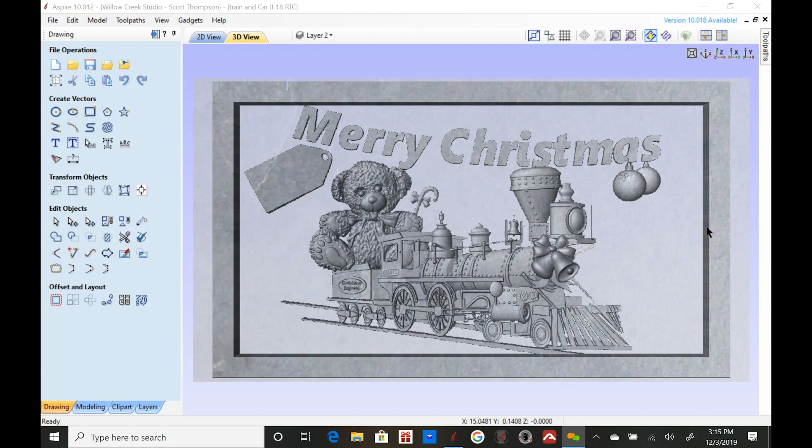We used curry combs, horse curry brushes, to kind of sand and get smooth areas, and lots of chisels and pocket knives and stuff like that in snow. And unlike ice—we did a lot of ice carving too—there you're allowed to use power tools.

So my background—this is all the setup to tell you guys that my background is an artist. I was telling Ted earlier today, and as I just demonstrated, I am not a technical guy. I'm not a computer guy, so I get choked up on computer stuff all the time. So if you ask hard questions, you'll probably get muted—I'm going to tell you so.

Well, what I wanted to show you today is I work in Aspire. So I'm going to do a piece with a crappie bass in it for you guys. I modeled the crappie bass a few months ago and sent it off to a few guys, and they all want to know, well how do you create all the environment? I mean, a lot of you guys pick up a model of a deer or a wolf or something, and you want to create some environment around them first. So I'm going to show you the tools that I use to kind of frame up an individual model.

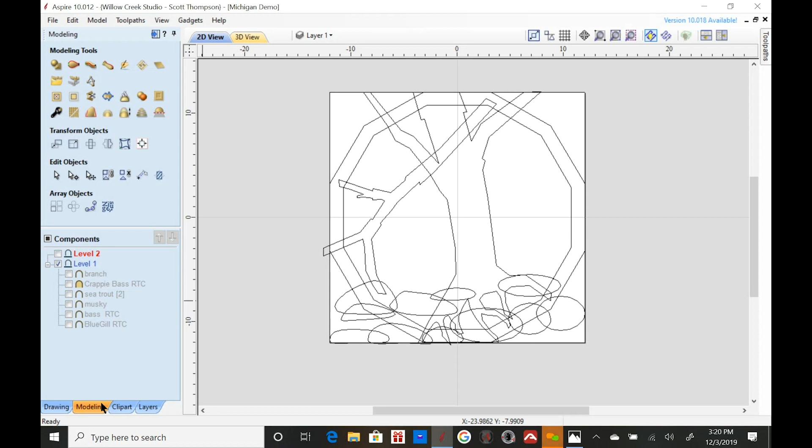Somebody else coming in. This is a 24-inch piece.

I usually start out by setting up, going into these screens, and some of this will be a little redundant for those who see this regularly. Job size, I'll go in and set up job size. In this case, I'm doing 24 by 24 inches, and you can see over here it's a 1.5 inch board, so this will probably be something I glued up.

I have it in high resolution. I commonly use, when I'm modeling, this slate black, just because I like the way shadows show up on it. It helps me visualize and see stuff better. So I get that set up.

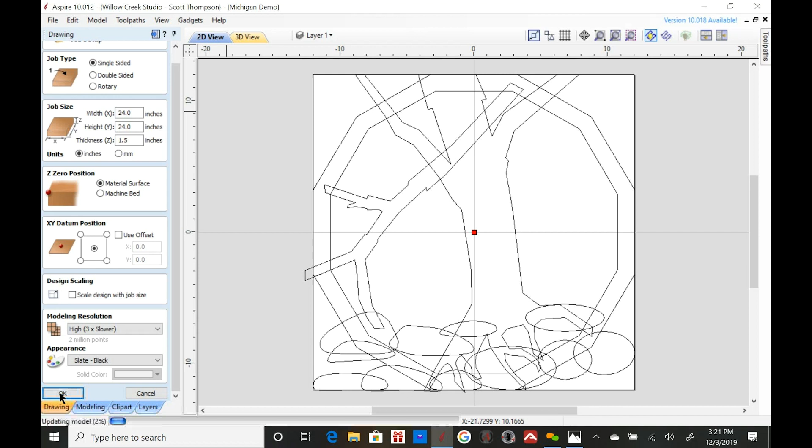So basically 1.5 inches. If I'm building a model, like when I have the crappie bass, I build them 3 feet wide and 4 inches thick, so I had lots of space to work on that. Here I got a smaller one.

I'll show you how I import them. So I've created a lot of vectors already on this. You can see, I used the polygon tool to create the frame vectors, these two out here that are apart. I'm not going to go through that - I'm assuming you guys have played with that kind of stuff a little bit. I'll just delete that one out of there. So I have two polygons here that are parallel to each other. That's going to form my frame.

So the board's 1.5 inches thick. I want some of these elements, like the branches and some of the rocks and maybe part of the fish, to come out of the frame, because I don't like to have everything just stuck inside a frame. I like to bring it outside of it a little bit for artistic reasons. So what I've gone in with and created these vectors - I've got some tree branches and stuff like that.

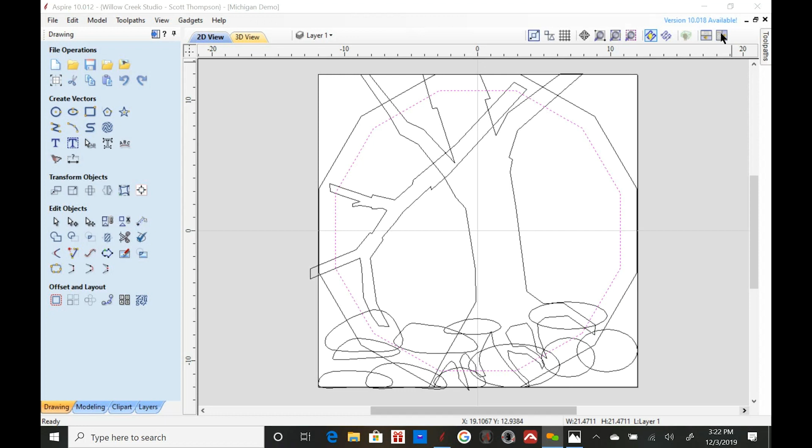So we're going to start out by, the first thing I'm going to do is create this frame. I'll split the screen by using this screen splitter up here. Let's see if there's a way - I'm going to probably turn off all your faces because it won't let me click on someone. So I set that up so you can see this, or split.

So I'm going to click on these two vectors together and hold down Shift, and click on that second vector. And I'm going to go over to the Modeling tab and click on Modeling. I want to create a flat frame, so I don't want any angle here.

I'm going to set it for 1.3 inches thick. Remember, I have 1.5 inches of wood. We're going to play, and when we're all done with this model, we're going to set the depth slightly differently. But I want this whole playing field, I want 1.5 inches to play in, so it's going to be 1.3 inches thick. There is no curvature, there's no actual final height model.

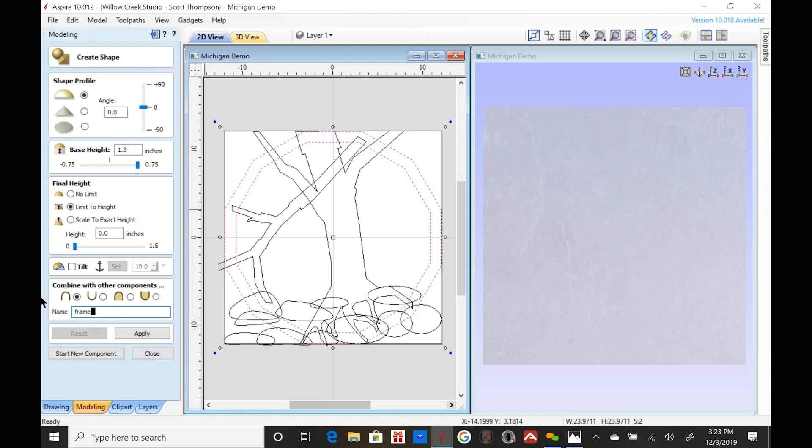And I'm going to just label this as frame, and I'm going to hit Apply. And we get a frame. So it's a little bit less thick than my materials are.

So the next thing I'm going to do is I'm going to start another component. I'm going to come over here and I'm going to say, let's create a tree. Now I want this tree to be a great big kind of root ball tree. There's going to be some fish swimming around it, and I want it to have some bark on it, and I want it to be places where there's no bark.

So I've kind of drawn this in pretty quick with node editing. I'm going to go back and show you guys - if you haven't used node editing, well, you have to draw some vectors to do it.

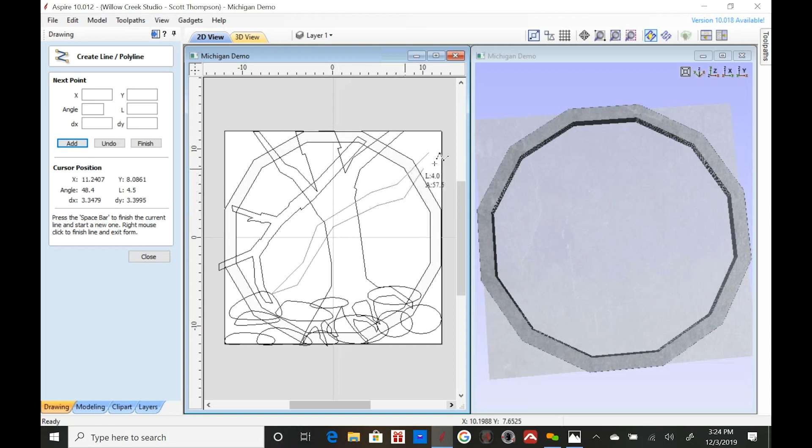So I'll come in and I'll draw a branch just across the whole piece, and then I'll play with it in node editing. So I'm going to delete that one back out of there. But using this draw a line diagram, I rough in trees pretty quick.

So I'm going to delete that out of there and go back to this one. Well, this isn't quite where I want it to be yet. So up in this area here, I've indicated there's going to be some bark here and there's going to be no bark here. So I'm going to come back down and create the equivalent of that at the bottom where the bark ends.

So I'm going to go back into the node editing tool, and right here I'm going to decide - I'm going to hit the I key to insert. I'm going to come out a little bit, not quite that much. I'm going to insert another node. I've created some more thickness right there in the tree.

I'm going to come over here and do about the same thing, create a node right there, making the tree a little bit thicker so maybe that part of it's thicker.

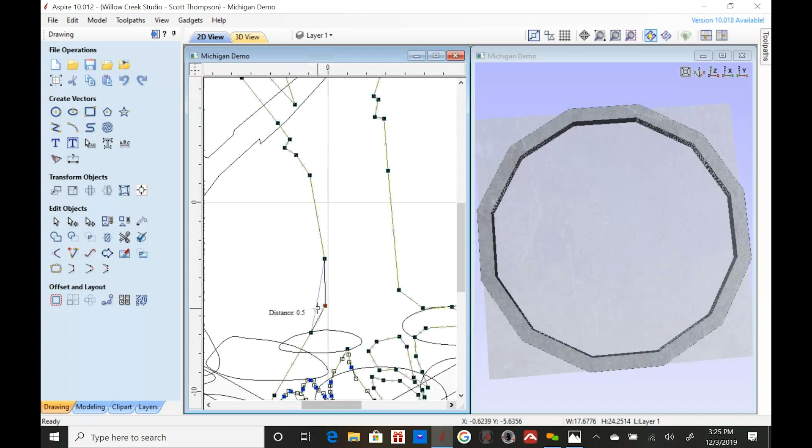Before I go too much further, some of this down here gets a little too linear for me, in two straight lines.

So if I go back to node editing, you can see all the nodes. One of the tools I'll use is grab a bunch of those nodes - now they're all red, you can see that if you look close. I'll click the S key, and that makes them all smoother shapes that better suit what I can play with.

We'll do more of that when I finish off some of these rocks down here.

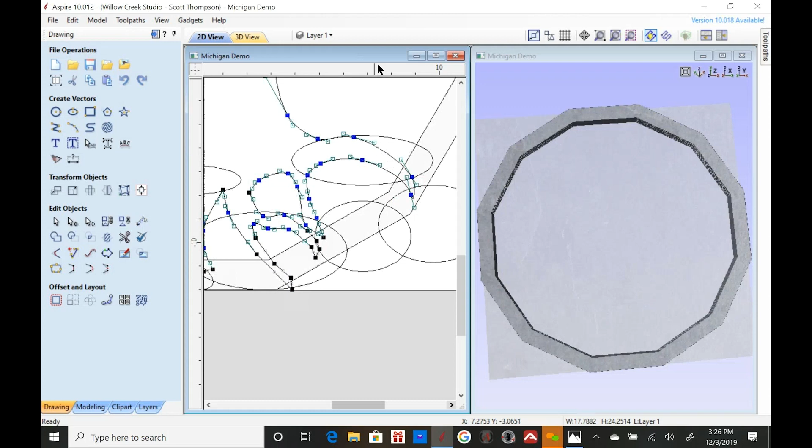I've got somebody else coming in. Dawn. Hello, Dawn.

Now I can see this tree. I don't like how thin the tree is right here, so I'm going to want the tree to be a little fatter. I grabbed the wrong bit of the...

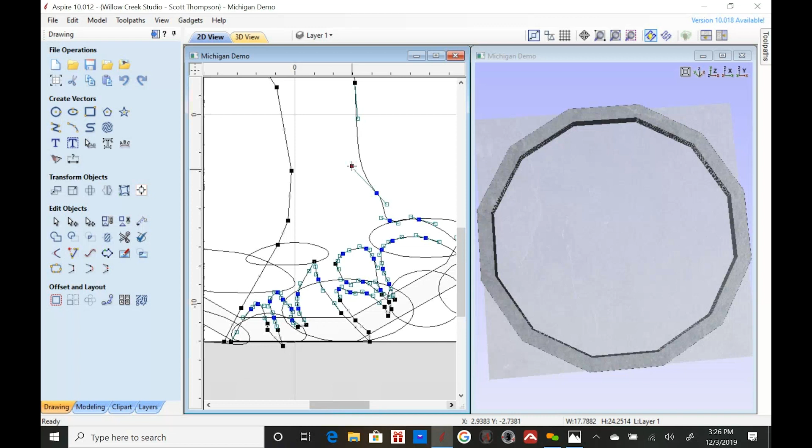There's the basic shape of our tree. Now I'm going to go back, dropping out of node editing by clicking on that button. Now I'm going to create the model of that tree.

I'm going to go back to modeling and click on create a shape. Now this particular shape, I want it set - some of this I haven't set already.

I'm going to go with a very small base. The base is the flat area before the model starts taking shape.

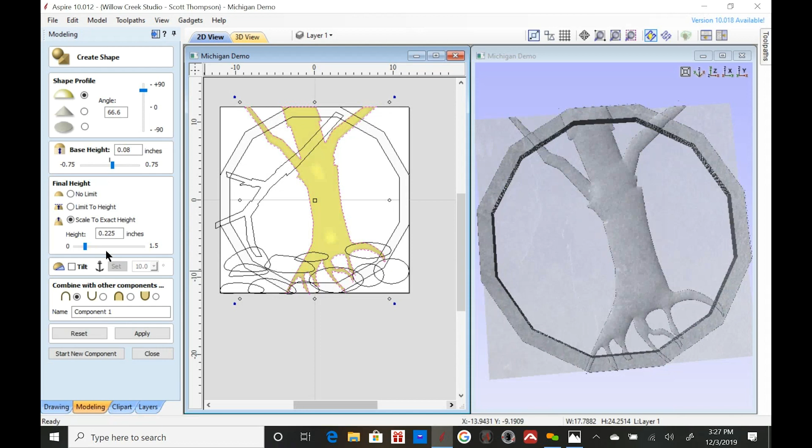Anywhere in here, if you haven't played with this particular tool, it tells you how rapidly the sides of the model are going to take shape and go up. Right now it's set so that most of the curvature occurs in the first part of the shape. I really don't want it that - I want it to be less rapid.

Now remember, we have 1.5 inches to play with, so I want this tree to be reasonably thick.

A couple things are happening here with this tree. One is that you can see it stacking on top of my frame - I don't really want that. But I'm going to call this, let's call it stump.

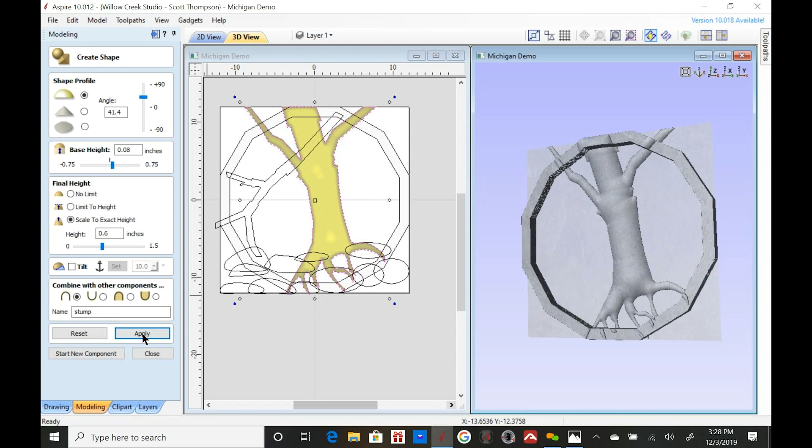I'm going to apply. I kind of like the general shape and the thickness of the tree. I'm going to close that right now.

And so these roots here, you can see very clearly that that's stacked on top of the frame.

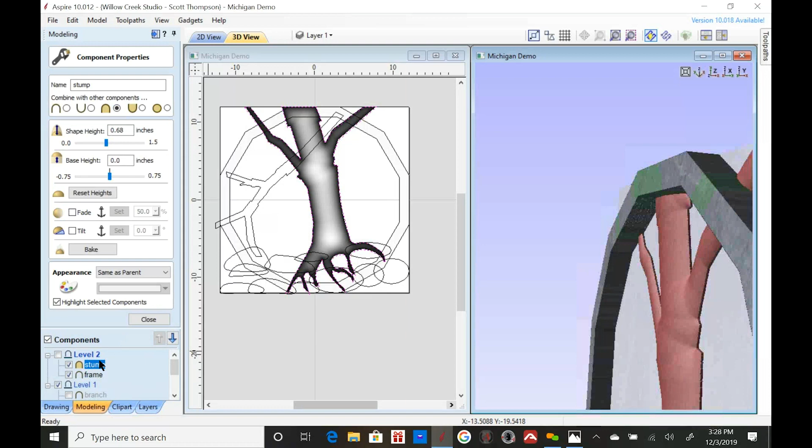So the way to get rid of that problem is to go through a process - this is how components combine with each other. So if I make that stump so it does not combine on top of the other elements, now it's below the frame. Does that make sense?

So this tree, looking at it, it's about 7 point. I'm going to make that tree closer to 1 inch thick, get a little more thickness out of it.

Now what I'm going to do next is - I have a Wacom tablet. For any of you that do artwork on 3D digital stuff, I have one which allows me to draw with a pen, and when I'm doing serious modeling I use it. But since I'm working with you guys, I'm going to just simply work with my mouse, which isn't quite as precise. I'm going to take this tree and do a couple things with it really quick.

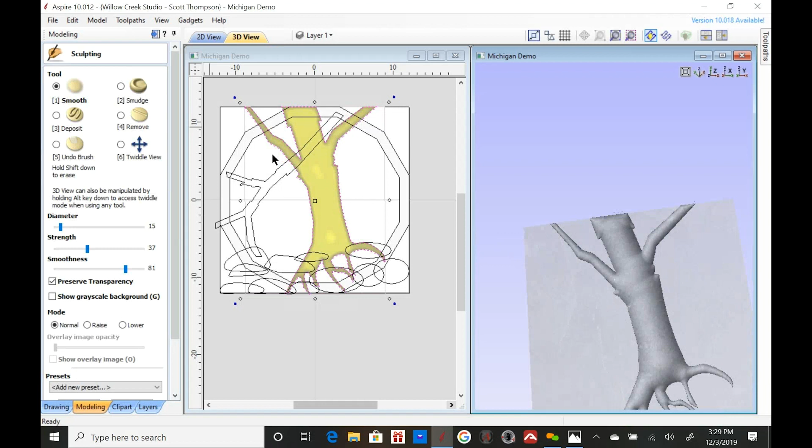It's easier for me to just make - I'm going to come up here to the sculpting tool. Now the only thing that shows up now is the tree. I'm going to go to the twiddle and drop this down to full size so I can see more of it.

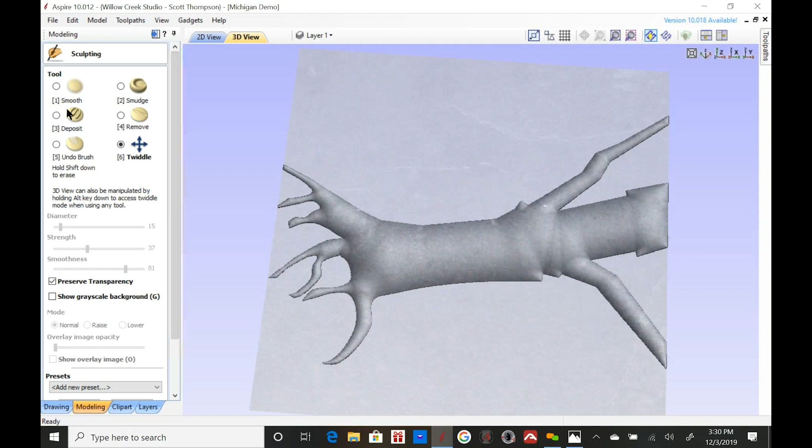I'm going to turn this tree sideways for a minute because it's easier to make left and right movements than down movements with a mouse. So I'm going to use deposit - now deposit comes with a bunch of different functions here.

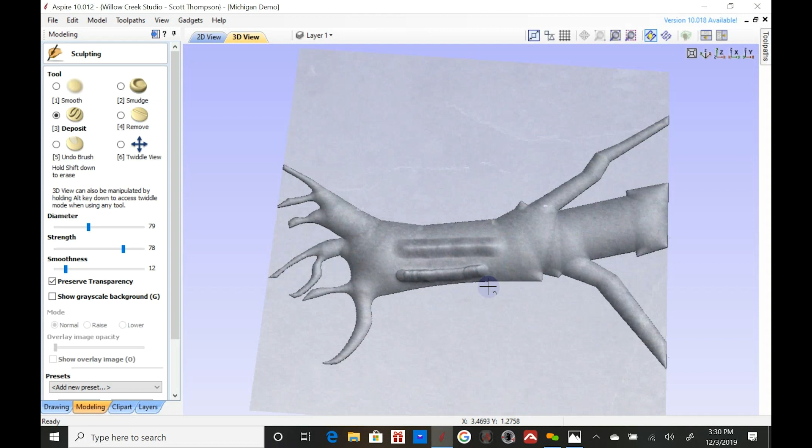The diameter - I have a roller on my mouse which makes it easy to change the diameter. Then the strength, which you never know till you start to put something on. And then the smoothness - look at that, that's a very smooth addition. If I make it less smooth, you can see the difference between the two. I kind of like this rough one because it's a little bit more bark-like.

And then my favorite brush of all - if you're going to be an artist, you have to know how to undo stuff. I'll just erase what I did there quick because that's not quite what we want to do.

I'm going to go back to deposit, a little bit smaller. I'm going to use slightly unsmooth, pretty strong, and start laying in some bark in this part of the tree. You'll see if you watch the size of my mouse here, I'll change it up a bit.

And it curves when it gets down here to these root balls, and I think I'll put in a kind of a knot right here.

Add in some more texture, different sizes for the roots, and up to there.

I'm going to go over to remove now for a minute. I'll click the remove tool and just kind of carve out some of what's in that knot, using the remove a little bit in here to make that bark a bit more. This is something you need to just play with on how you do it. I also use the smudge tool, and the smudge tool kind of blends things.

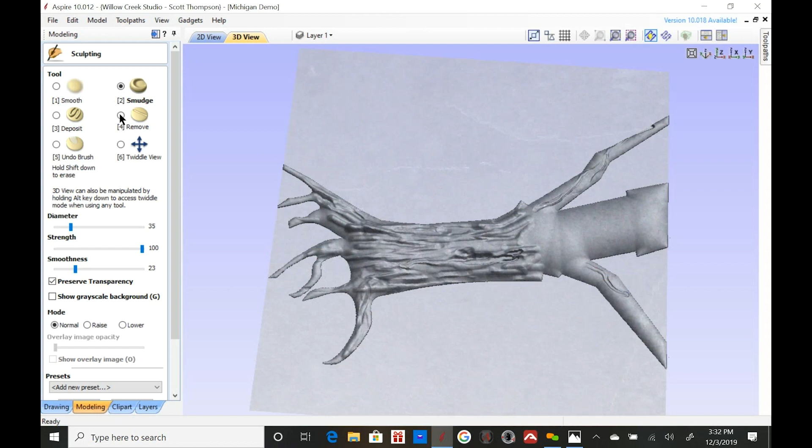So back to a twiddle for a minute. Pull this up here. Now I have more bark up here, so I'm going to lay most of my bark in quick, and then I'll come back and show you how I tie those together.

Put a remove in here for a second, and let me go back. I'm going to smooth out this center section for a minute just to round the edges of it a bit more. And then I'm going to use remove.

A lot of these big trees that we have, at least up here, big cottonwoods and stuff, you can see some of the twists. That's a little more than I wanted to do, so I'm going to take some of that out with my undo.

I'll go back to remove, and I'll soften that up a bit and make it smaller. I'm just going to put some curves around that log. It helps the visual, helps the eye understand that that's a round element.

And I'll put some cracks in it. I'm going to give myself a little extra here for this, and put just off center a crack in this log. Maybe something down here with this branch.

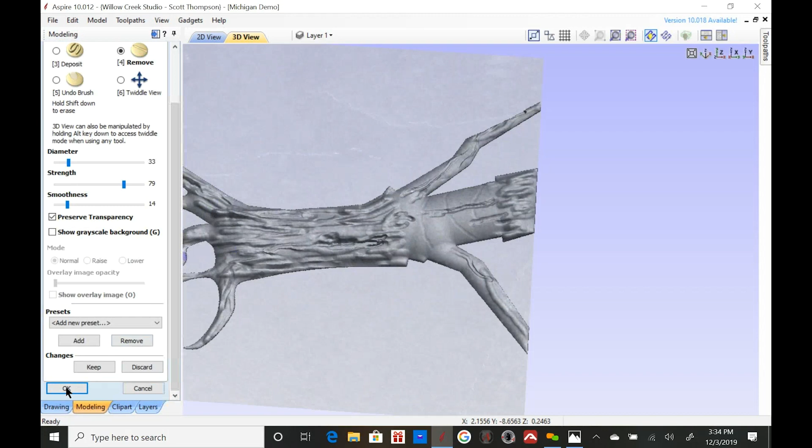So that's kind of the basics of just making this. I'm going to say keep that now. If you use this tool, that means you can't go back to where you were before. I'm going to say OK, and I'm going to put my tree back where it was.

And there's a tree. Now I did that with the other tree already. Oops, I guess.

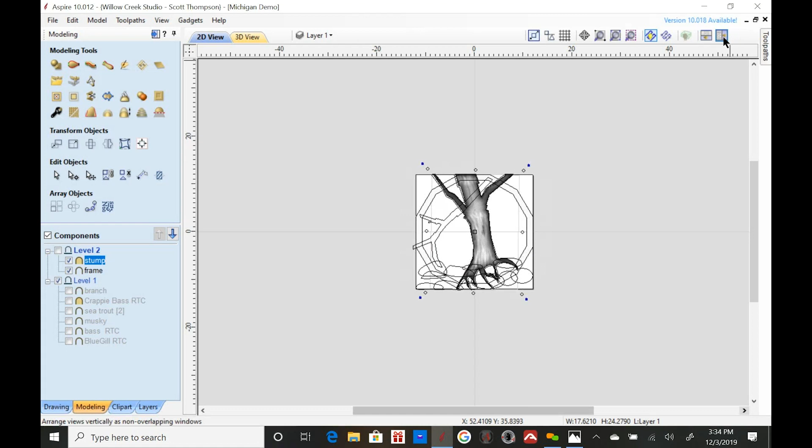Let's see, I apparently turned the whole thing. You guys are supposed to watch that stuff. So I turned the whole frame and everything. Now we're back to where they were.

I already did the other tree, this branch here, so I'm going to bring it up and add it in, so you don't have to watch me do that same thing all over again. You can see they're kind of impacting each other and hitting each other, and that's not really what we want to have happen.

What I want to do is build some rocks really quick with you, and then talk about how we get the fish to swim in and around these different branches, and how we get the branches to not impact each other like you see happening right here. But I'm not going to worry about it for right now. So, any questions about making a tree like that? Pretty simple stuff.

Aspire. So down below here, I drew on this side. You can see all I did was add in a bunch of ovals, one, two, three, four, five. And on the other side, I've already started editing the boulder.

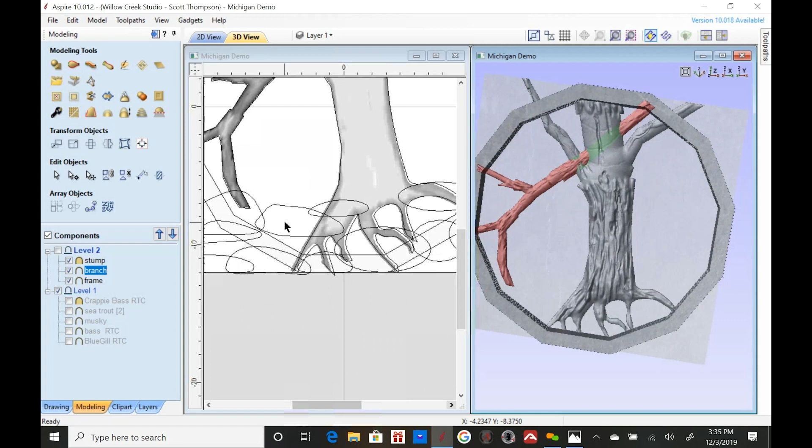All that means is click on this rock right here, and I'm going to go back into the drawing tab. I'll hit node editing again, and I just want the rock to have kind of a flat bottom for this piece of artwork. We'll make this side a little deeper, and change some of the aspect of that a bit, maybe make the rock a bit more like that. A couple other rocks here we'll do quick.

We can move these all around later.

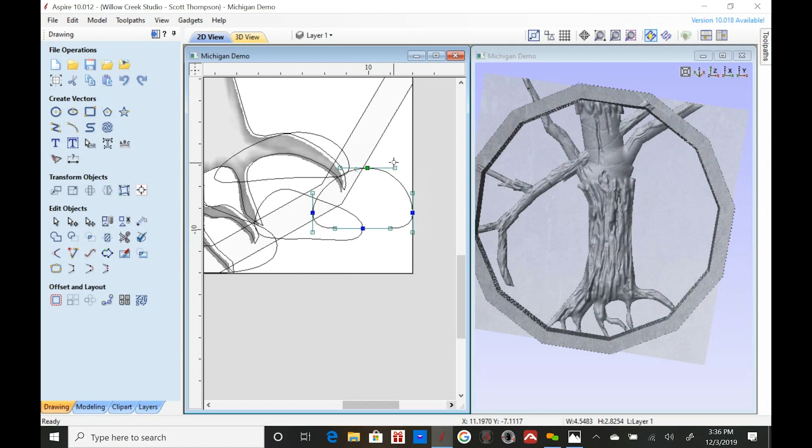So I got a bunch of rocks, at least the lines drawn out for some rocks at the bottom of that piece of artwork, and now I'm going to start. Whenever I paint, I paint at the back and then forward. So you'd put the sky in first, then the mountains, then the trees, then the duck in the foreground, sort of thing. It's not unlike that with rocks.

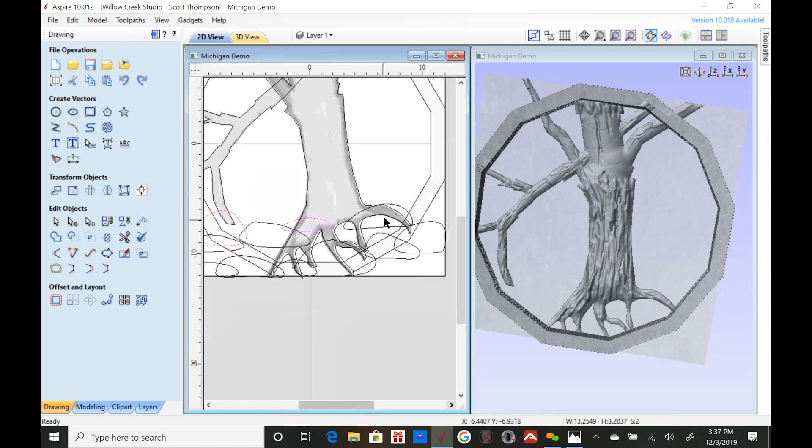So I'm going to go back to my selection tool. I'm going to select some rocks that seem to be in the background and do not overlap each other. Now remember, this tree is about, what did we set it at, almost an inch thick, right? But it doesn't have much of a base, and we'll end up having to play with that a little bit later on. So I'm going to create a group of rocks.

I'm going to create 3 rocks at once, not much of a base height, 6/10 high, a similar kind of an arc to the top, and I'm going to call this back rocks. I'm going to hit apply and see what occurs with my back rocks.

So you can see what's going on with how they stack. They're not stacking the way we want them to, but I'm okay with that. I'm going to hit close. If I move them underneath this, you'll see what immediately happens is now they're behind the tree, because the stump is set up like that, but they're still not in the right place relative to the frame.

So I'll move them, but that doesn't do it either. So back to how they stack, we'll click on this. I can't tell you how much time I spend with this trying to get it right. You can see the rocks are now back behind the elements I want them behind.

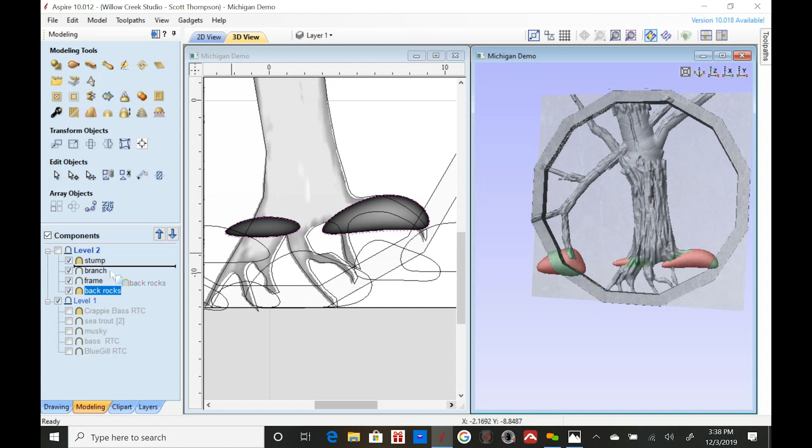So it makes a difference how you stack things and then where they are relative in your model, how you put them in your levels. Does that make sense? Something like this is pretty simple, but you start doing something like that train I showed you early in the class, and it starts to get very complicated.

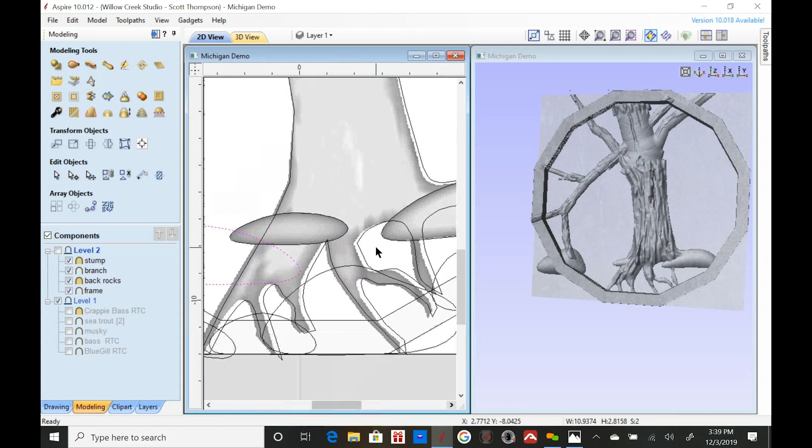So let's put in a couple more rows of rocks really quick. I'm going to get... that's a tree, we don't want that. There's another row of rocks. We'll do the same thing.

I'm going to add this and click it right away. We're going to add a little bit more depth there, because we want those to appear in front of the other stuff. So you can see now I've got the rocks, see the difference right here, and that has to do with the base height. I increased the base height enough to get them to push out in front of the other rocks.

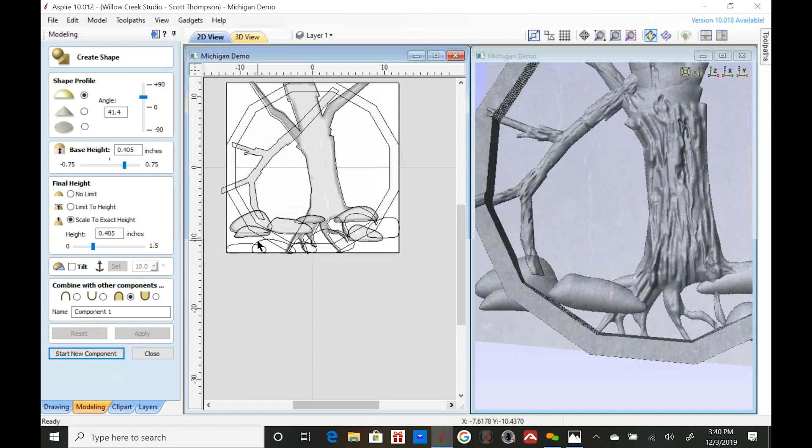I'm going to flatten down because I just don't quite like that. So that's rocks 2, or the new component. We'll do a couple rocks down here. These are going to be fully more in the foreground.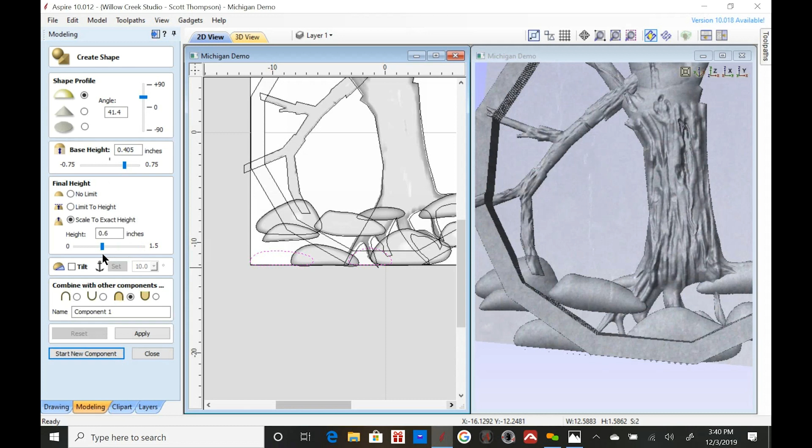These ones I really want to kind of come out a long way, maybe even... So if I put this all into the final shape, I get really pointy rocks. See how they're very pointy? And you can see with this one rock right here, it comes out above the frame, but we're framing it at 1.3 inches, and I have 1.5 inches of total material. So if I want a rock, this will be on the frame, but it's just a little too pointy.

So I'm going to come back down to something more rounded with the rock, I'm going to set the base. 0.75 is not enough, so I'm going to ask the base to be, I have a rock 0.4 thick. I'm going to intentionally create a problem here and ask the base to be 1.1. Now 1.1 was 0.495, about 0.5. If I just make that actually a half an inch, just to make the math easy.

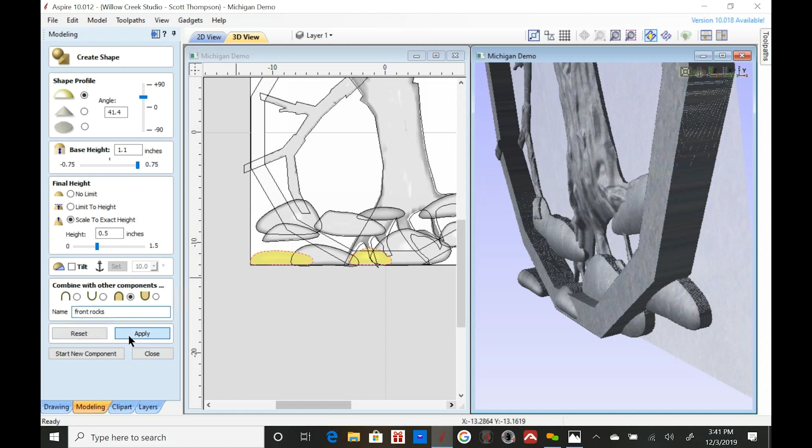So now we know about this will be our front, we'll call that front rocks. What we know about these front rocks is they're probably higher than the thickness of the wood. That makes sense. But they're where I want them to be right now, so I'm gonna leave that the way it is, just for right now.

So we've got this kind of roughly formatted here. What I want to have happening is a little crappie bass in here chasing a bunch of minnows through a brush pile. Pretty common, if you're out ice fishing, just fishing in general, jigging for crappie bass, you're in thick garbage. So I want to create that occurring, with the crappie bass swimming around.

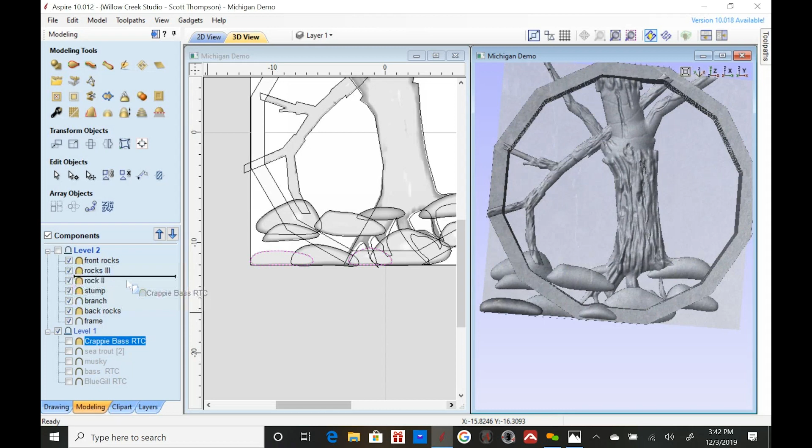So I'm going to bring my little bass up here and put him in. Turn him on. So there's my little buddy, but you can see he's swimming right into the tree right now. He's part of the tree, which we don't want to have happen.

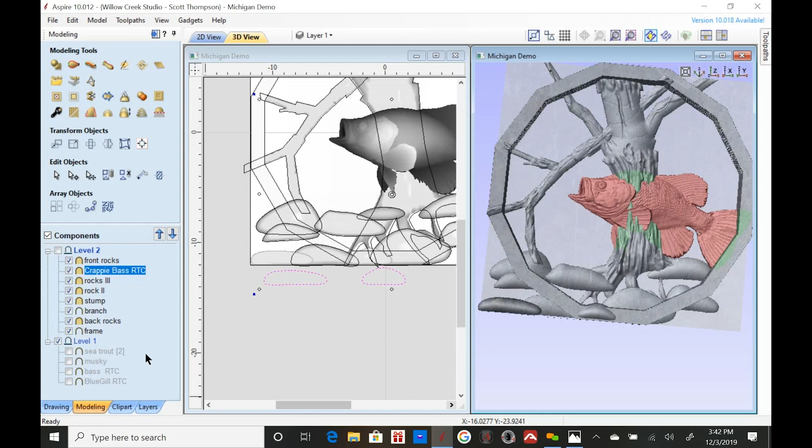So we're going to work on where he goes, and I have one other thing I'm going to bring in here. If you look down here, I have a sea trout model, which they don't really swim too many times with crappie bass very often. But what I like about the sea trout model is it looks a whole lot like a sculpin or stickleback, like a small minnow.

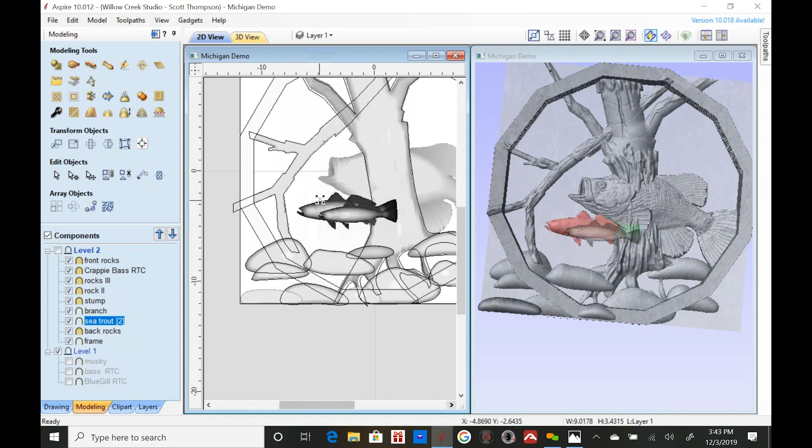I grabbed some of my rocks and brought them in here too. We want kind of a school of these small minnows in here, and I'm going to make him my sea trout be my minnows. So we're going to put a group of those in amongst these rocks.

We're going to have the crappie bass trying to grab one or two of them, and we want them swimming around the trees doing that. So let's play with just how this stuff all stacks.

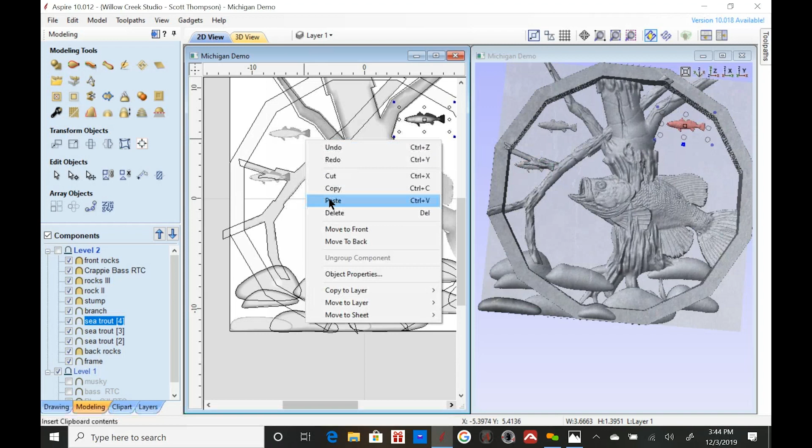I'm going to eventually copy the sea trout and paste him. So we got four of them. We'll play around with where they're going to go and how they stack. But the first thing we want to do is get the crappie bass kind of where we want him sitting.

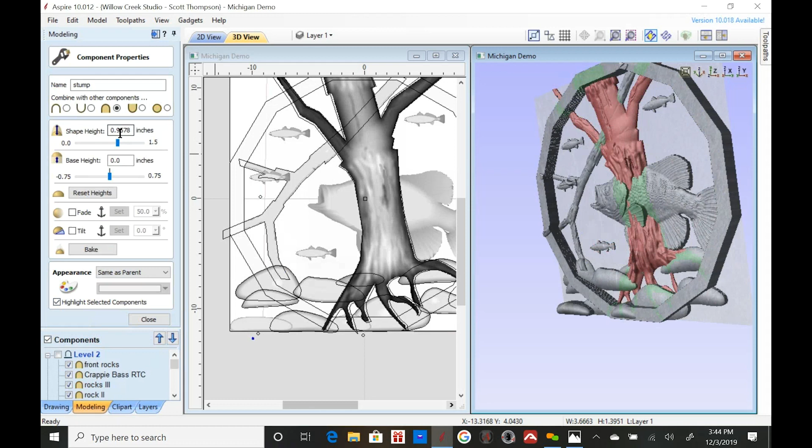So you can see this tree, we'll go back to the stump. If you look at the stump, it's almost an inch thick. So we have a half an inch above that tree to fit the crappie bass into. I don't know that that's enough, but I'm going to show you some tricks that I use to play with that.

If we kind of want him sitting right about where he is, we'll close that out and go back to crappie bass. You can see his shape height's about an inch, which as you take more height out of the shape...

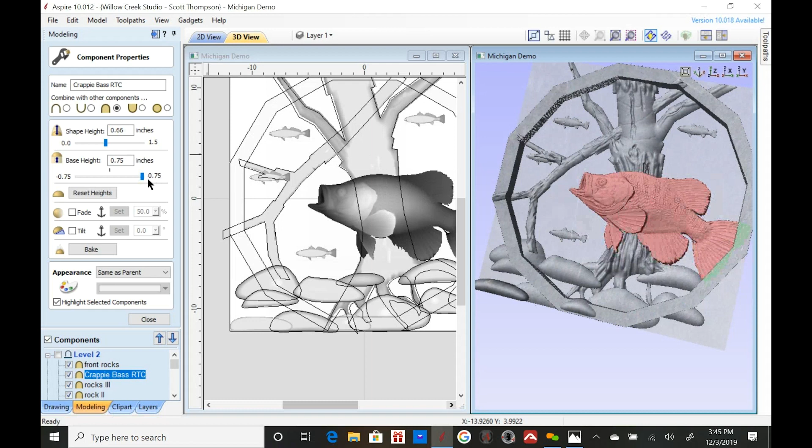He starts to lose some of his detail. We're down 0.6 of an inch, it's still not bad, but let's bring his base up. So he's fully in front of the log with that base at 0.75. You can see he's kind of fully in front of it.

What's going on with his tail? His tail is behind the frame. So what I want to do with that—remember, we have a quarter inch above the frame, so I have a little bit more thickness I can use in the crappie bass. But I think what I want to show you is I'm going to do a tilt function right here.

If you look over here in the model, I'm going to hit tilt, and I'm going to hit set. Now there's a couple interesting things about set that I just kind of learned. I want to show them to you in a couple different forms. So when it says set, it's telling you where do you want it to tilt from.

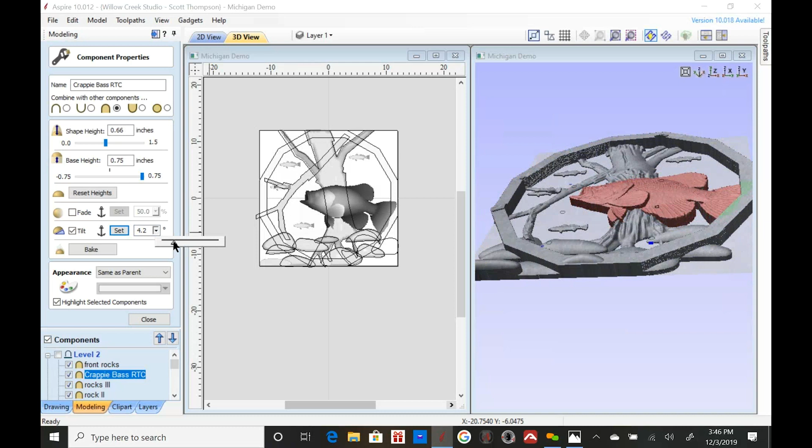But let's undo that for a minute and go back and say, well, maybe we don't want to do that. So let's go back and say set. And this time we're going to put the set point right here, and we're going to click on the end of the tail.

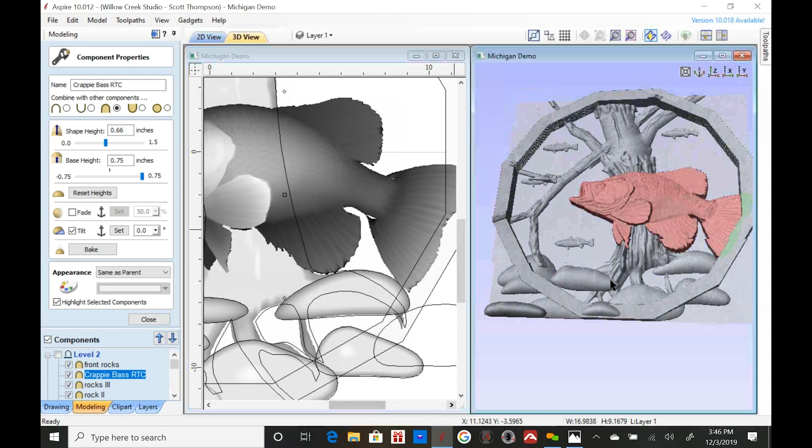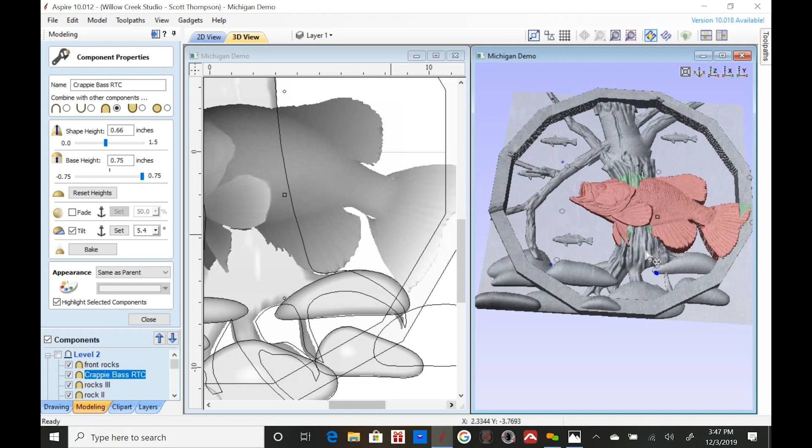Okay, so now watch what happens this time. We're going to do the same, about 4% of tilt. Well, that was interesting. So now this is different about tilt than fade. Did you notice what it did to the head? It lowered the head and raised the tail. I can't say that's what I thought was going to happen when that occurred.

So I'm going to undo that. I'll show you in fade here in a few minutes how it's different. So let's go back and reset. Remember, I'm an artist, I play with this stuff all the time, but I can't necessarily say I technically know all the reasons why it works.

So we're above the frame now. I'm going to take a little bit out of the base, a little bit back into the thickness of the model. Combined, we're at about 1.3 inches of total height.

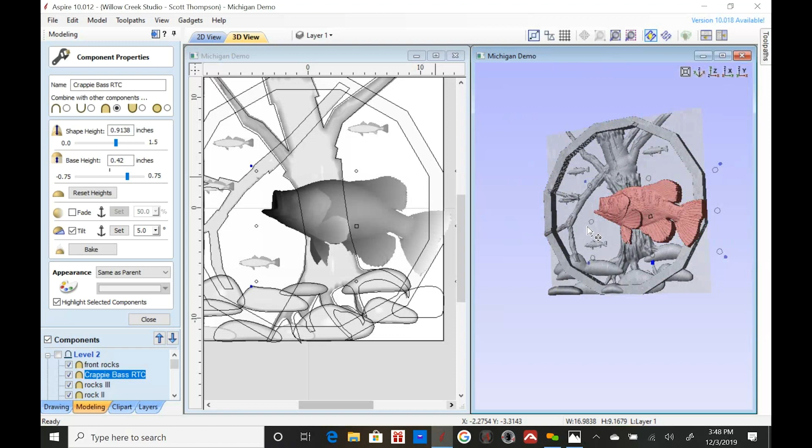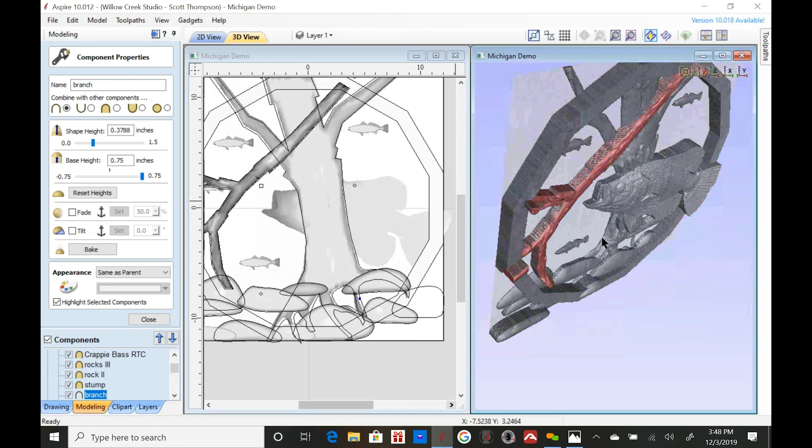So we'll come back to the crappie bass in a little bit. Let's play with this right here, put this stick in front of the log, and we can do that by adding base to it. We have the same problem here with it stacking wrong on my frame, so I'll look at how it combines, and that ends that problem really quick.

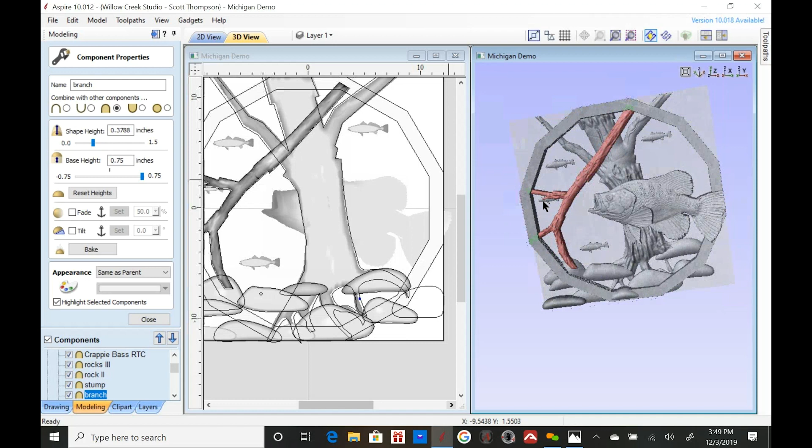Good. And then let's put our primary victim, this little fish right here. We want him in front of the stick, so it looks like the bass is about to grab him. So again, we need more base height to do that.

That's not enough, we're going to add in 1.1. I think that's going to be pretty close. So there we have it, you can see that he's kind of lined up with that.

You guys get seasick, just turn your head away for a little while I'm doing this. It's like somebody else in a car.

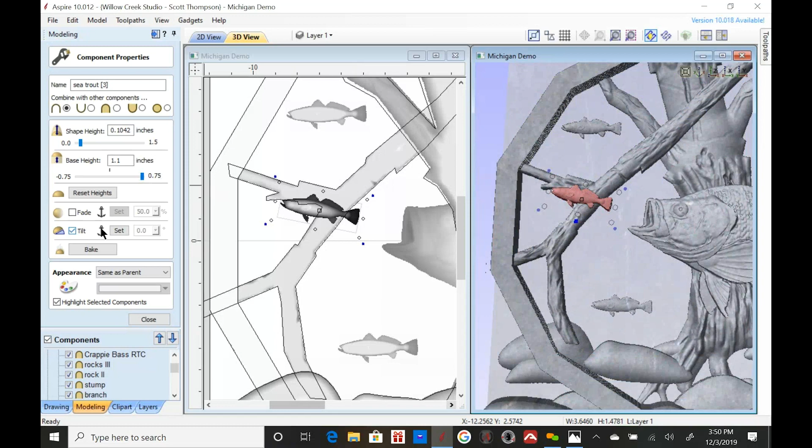I kind of want him coming out of the carving a little bit, so I'm also going to tilt this little minnow. You can see it creates that kind of effect, that's what's going on there.

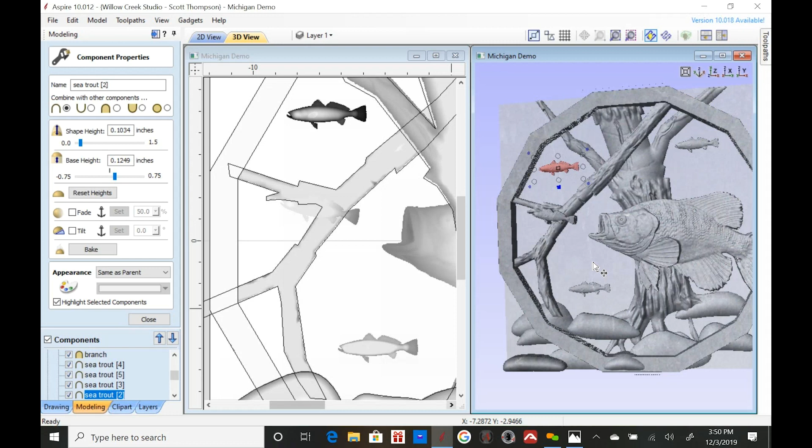Can you tilt at negative angles? Explain what you mean by a negative angle you want it to go. That you want it to tilt a different way, the head down and the tail up. Oh, is that how you do it? Yeah, so in this particular case, with this guy right here...

You can see right now his head's way up with how I set it. That involved me setting it, clicking set at the back of his tail and ending it at his head. But if I take that out of here, now he's flat again, and I say set, and this time I click on his head, and the second click is on his tail. Now what it's telling you is the second place you click is what's going to be raised. See how his tail came up?

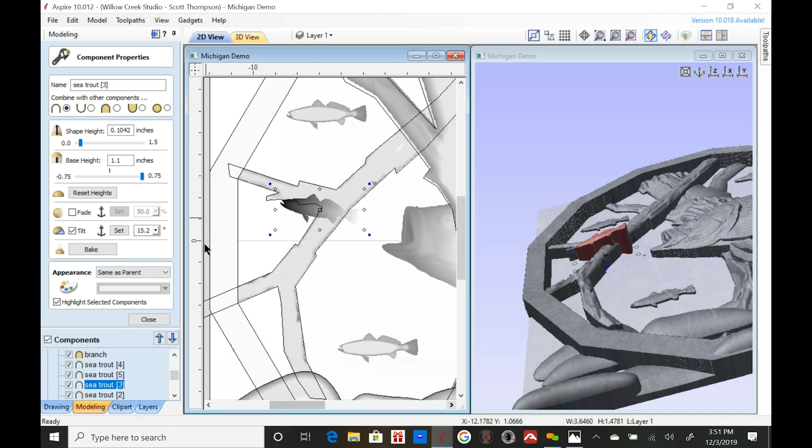Does that answer your question? Yes, sir. All right, you can lower him back down and say maybe that guy is actually diving underneath the branch to get away.

And we'll bring another one down here and get above the branch, one up. Maybe we want his tail just like he's coming out, so we're going to set, we're going to do tilt on this little guy. We're going to set again, and this time his tail up in the air. So I click on his nose, then his tail, and then... not enough, a little bit more height. So now I've got one of those guys going around the front of the stick and one going around the back.

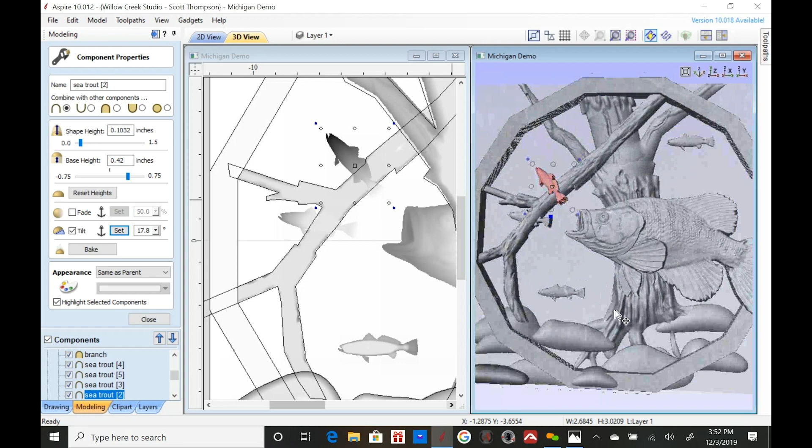Just try it away. All right, any questions about that?

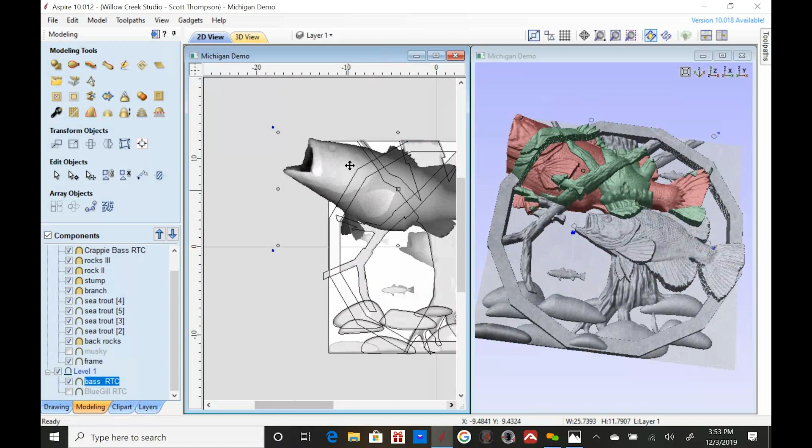So you can always... there's, let me see. You're dropping a large musky in the middle of this. I don't think anybody wants to put a musky in the middle of that one. I do have a large bass that you can put in. But you can do the same kind of thing for this.

I do a lot of this sort of stuff. Maybe we want to have a bluegill in the background. Probably fits better. Maybe put it even down.

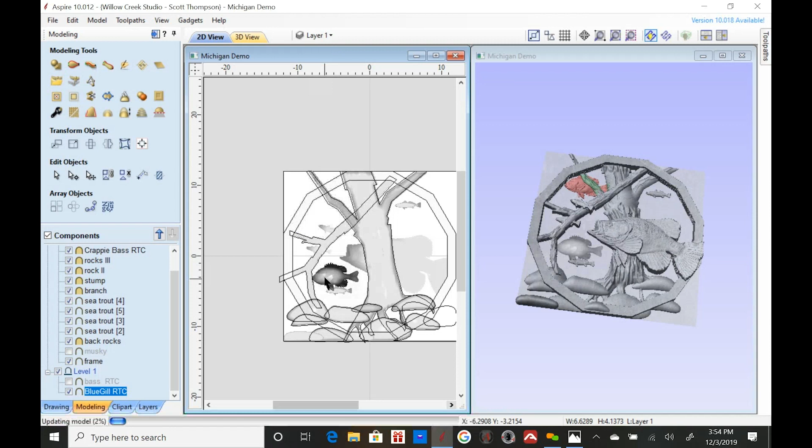So that's kind of the basics of what I wanted to show you tonight, just about... I know a lot of guys, I sell a lot of individual models like bass or deer or elk or moose, and they all want to know how can I get more environment behind them. I think if you have Aspire, it's pretty easy to make some pretty looking background, you just have to play around with how to stack the different components in there.

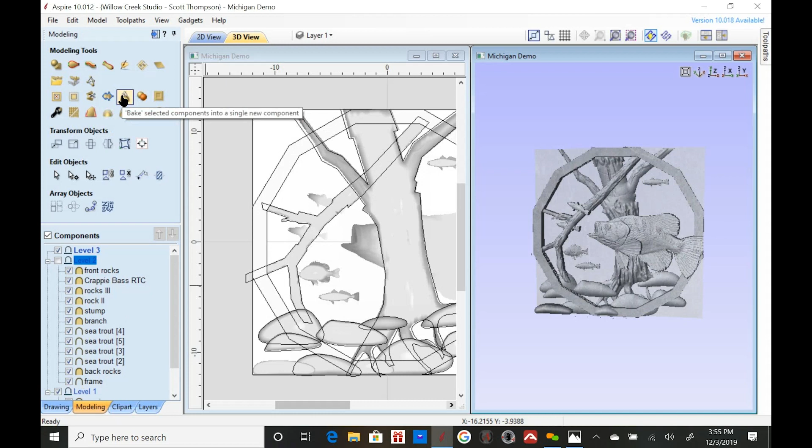If I was going to finish this now, I would insert another layer. And if you haven't used this tool, this is a pretty new tool, it's create component from visible model. We used to have to bake everything to do carving, now you don't have to do that. You just say create component, and it takes all the components and turns them into a model.

Now what's happening right now is you see everything in level 2 and level 3, so I'm going to turn off all the component pieces and just keep a copy of the visible model. So now I have one model, and I still have all the components of it. So sometime later, someone comes back and says, hey, would you put a carp in there, or want the fish to be bigger, or I want to do something different with how the rocks lay in there, I can go back and dismantle them. So to finish this piece up, I would...

Rename this, I'm going to just say... I'll rename it here in a minute. But right now you can see the total height of this is 2.6 inches, so it's way past the thickness I have. So I'm going to reset the thickness to 1.5, and I think what I really want to do is set the model thickness to 1 inch.

I'm going to go over and check my tool path. This gives me, if I have the models 1 inch thick, a half inch of wood underneath the model in the background. That's kind of how that would finish up.

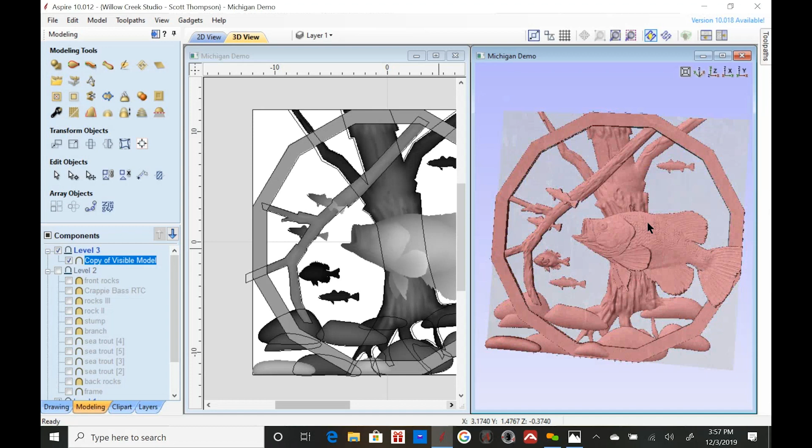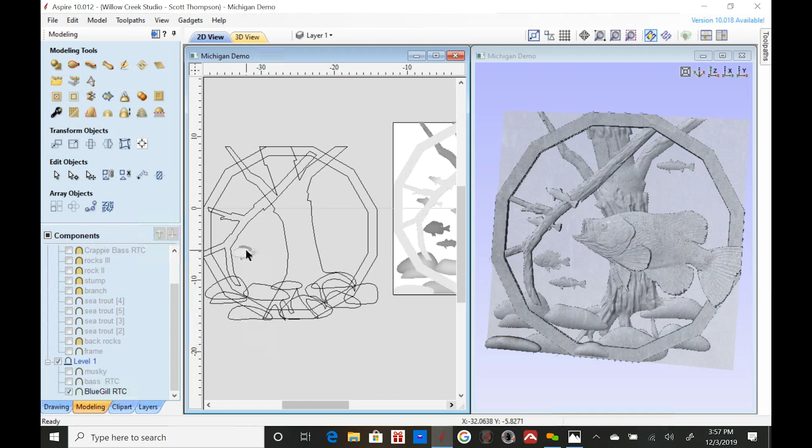So I can remove that. When I go to turn this into a tool path, I grab all the vectors and pull them off. That's all the vectors I used. I pulled the next row, the blue row, and then I had a couple more.

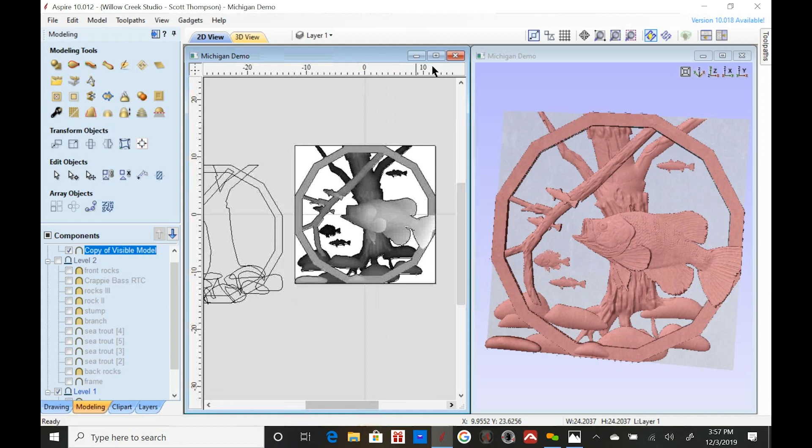So then you can hit this and, under modeling, use create vector boundary around this, and in a model like this it's going to create all one vector, really. If you look, you'll see internal vectors and external vectors. I'll hit shift, hit ungroup, and take off the outside vector used for the outside cut, then regroup the inner vectors in case I want to use them. But mostly I'll use that outer vector for the tool path.

What's going on right now is it's going to try to carve all the way through.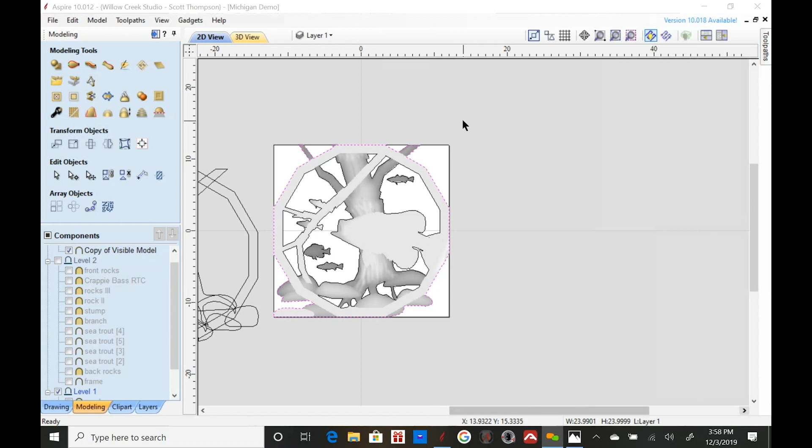Somebody did. Okay. Thanks, Ted.

If you try to carve this right now using that outer vector, I got to lock the tool in and tell it to carve, use a 1/4 and 1/8 inch ball nose, I hit calculate. What's going to happen in all that airspace? It shouldn't carve anything — it should leave that all sitting up at the regular height.

We'll find out in a moment.

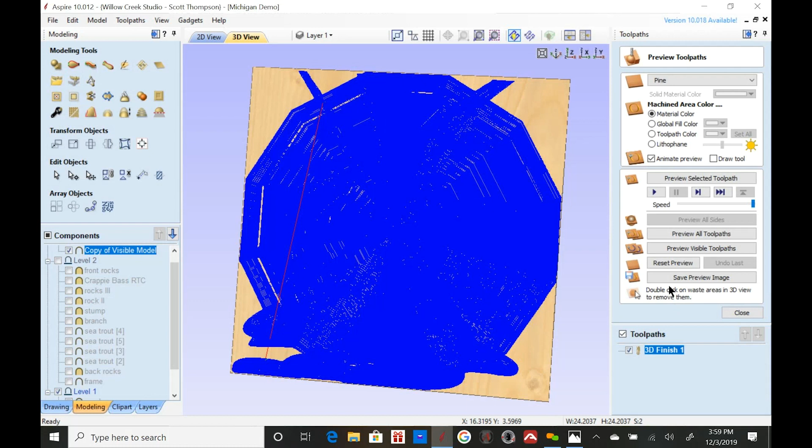I know you guys can stand this because you all stand around watching CNC machines carve all day. Yeah. I don't know, Scott, I've never watched a CNC machine carve all day. Yeah.

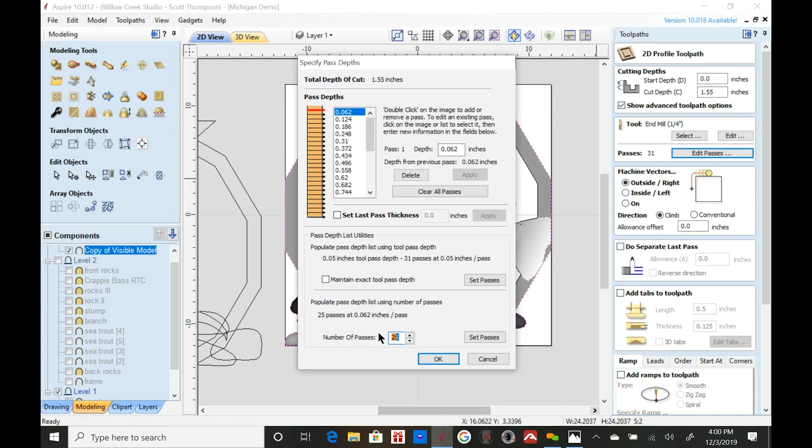We'll take that outside and do a profile cut. 1.55 is a little bit past depth. I don't want it to take 31 passes to go that far — let's just do 9. Okay.

So that's kind of a quick look at composing pieces like that, maybe going a little bit outside of it. I would spend some more time on it.

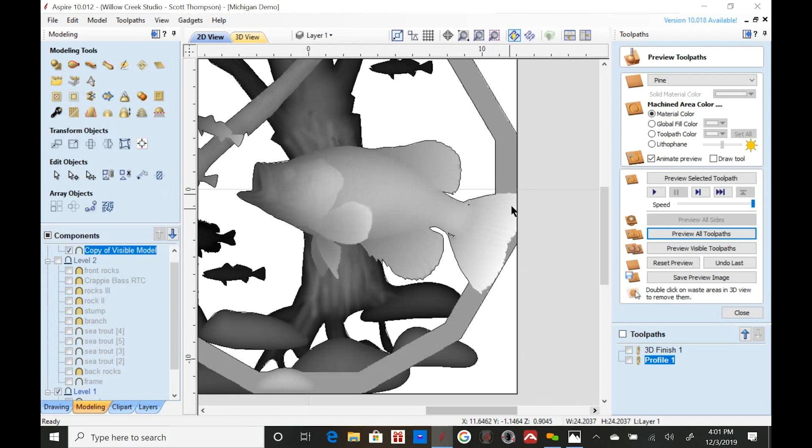So part of what I did was my crappie bass went off the model, completely off the space, so that tail got cut off there. I would probably do something to fix that. You can see it got really flat right here. I'd play with some of these roots and make them come over top of the rocks, and make the roots come over the frame a bit.

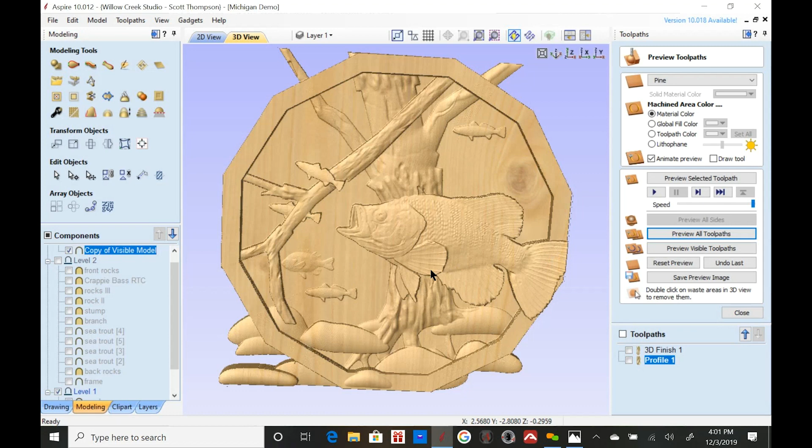Might put some nuts and bolts on each one of the corners — I've been doing that recently, it looks pretty cool. Yeah, and I'd probably play a little bit more, get some more depth out of the crappie bass.

When I'm going to really carve one of these, I spend maybe 2 or 3 times as much time setting it up and reviewing how it looks, making sure I've got everything the way I want it and the movement's right. You can look at them and see how they're going to carve if that's what you wanted.

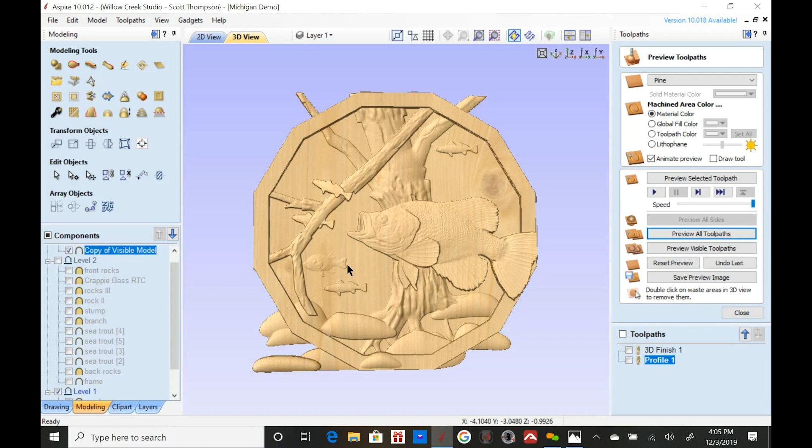It's fun to talk. You guys live in the heartland of this kind of stuff. We sit up here in Alaska, I have 2 kinds of wood, that's about it. You guys are in kind of the manufacturing heartland and I don't hear what's going on with CNCs down there. It's very new up here, there's like 4 of us in the state that have CNC machines, so it's fun to see a group of guys working together.

Well, that brings up one question. You said you were going to use a 1.5-inch piece of wood and glue it up. Do you start with 1.5 inches and just glue up the width, or do you glue up the thickness?

No, I start—a lot of this stuff I make out of 2x6s. I just take some 2x6s and run them through the planer on the sides, then I use a biscuit joiner, and that's how I get my larger panels.

Okay, so you're just using rough fir or pine? Yep. And you're finding that's carving okay? Well, remember I'm a hand carver, so I do end up finish carving more often. Fussing with it, but you're getting the rough feature out of it then. Yeah, so I do that. I do use panels from the box stores.

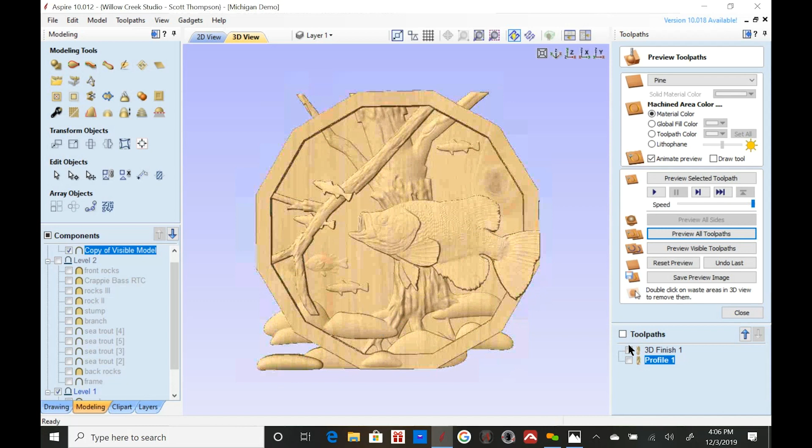They have glued up panels that are pretty nice and carve better, and I found some now that aren't just pine—there's birch panels, countertops and stuff that carve much nicer. To get walnut up here or any of that stuff is ridiculously expensive, so most of my stuff is carved out of pine or birch.